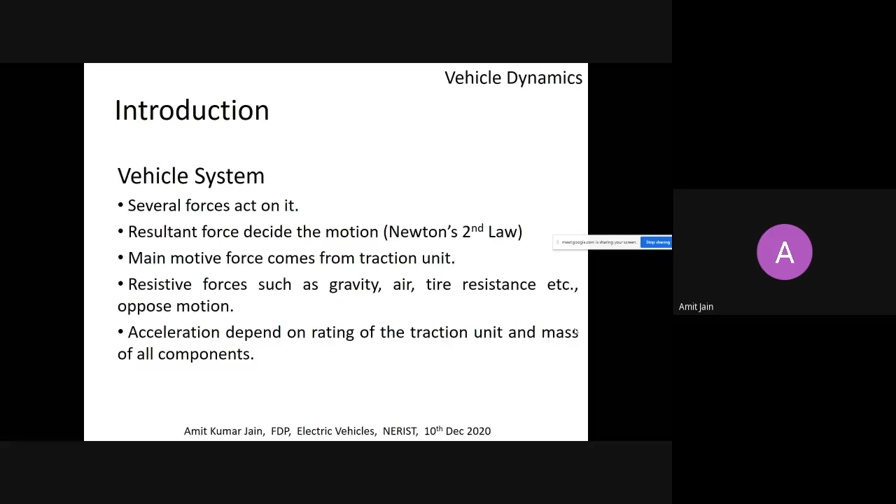Basically, there is something called system level design and something called component level design. System level design is a bigger picture, bird's eye view of the system.

Typically, if somebody asks you what you are looking for, they will say two things. Acceleration should be so good that I can accelerate from 0 to 100 km/h in 5 seconds, 10 seconds. That's how vehicles are generally compared. So acceleration is important.

Secondly, range. Range is not a parameter in petrol-based vehicles, but it is important for an EV, because if you are using a battery electric vehicle, your only source of energy is the battery, and there is a limited amount of energy stored in the system. So range is a criteria.

But these two are conflicting things. Let's say you have a battery with a certain amount of energy stored in it. If you want very high performance, like high acceleration, somewhere you're eating up your energy, and so you have to sacrifice on range. So acceleration means power, and range means energy.

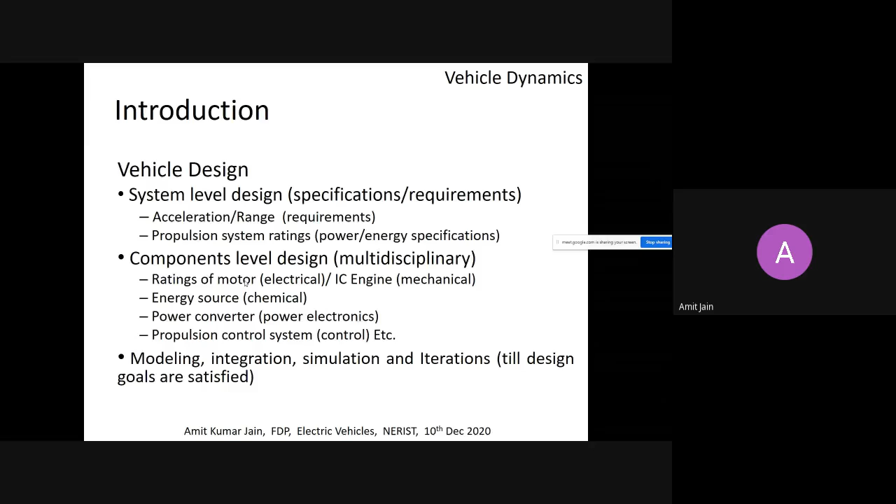And imagine if you have to go for a 50 kilowatt or 100 kilowatt motor, like what is used in a typical high performance car. There you need to increase the DC link voltage to 300 or 500 volts, so that currents are still under some kind of limit, under 200 amps and all that. So these are all things that have to be designed - it's not just one parameter.

As I already told, acceleration is depending on the torque rating. Torque into speed is power, so torque-speed is again power rating. Range is basically a function of energy, which is depending on the battery capacity.

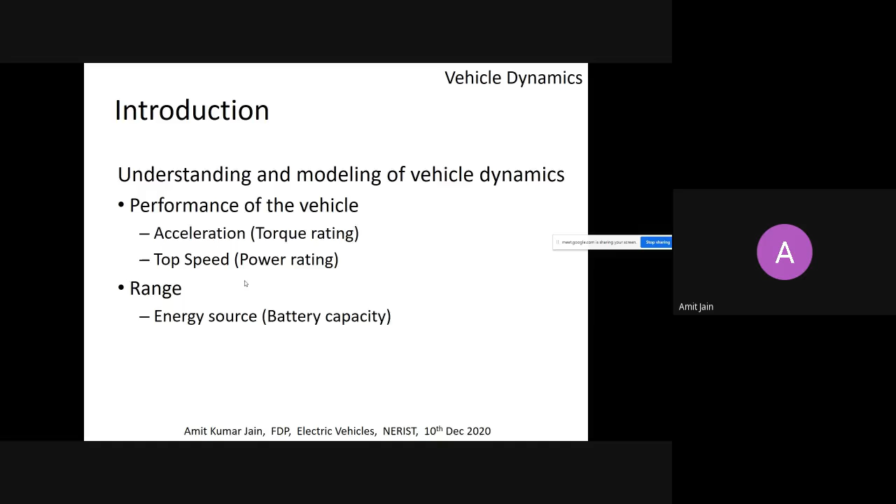So when you go for modeling, there are two types: longitudinal and lateral. We generally do longitudinal modeling because we are not using multi-wheel driven vehicles. It's possible to use only one motor for driving the whole vehicle, but there is another possibility - multiple motors attached to multiple wheels, with each wheel driven by an individual motor. In that case, the lateral vehicle dynamics comes into the picture, and it is quite complex.

But though it's complex, it gives the flexibility that no petrol-based car can give. It takes the electric vehicle to a next level, even better than petrol-based vehicles. Cars like BMW i3 or Tesla are very popular not just because they are electric - the performance and the kind of controllability you have in those vehicles are enormous. You have all the flexibility. All four wheels have four motors, and they are controlled by complex control systems.

You can park your vehicle just by shifting your car by 90 degrees. All of you know that the engine doesn't have a smooth speed control, but an electric motor can have a very precise speed control with very nice dynamics. So an electric motor control based vehicle will be very good - that's another reason why people are looking for this kind of vehicle.

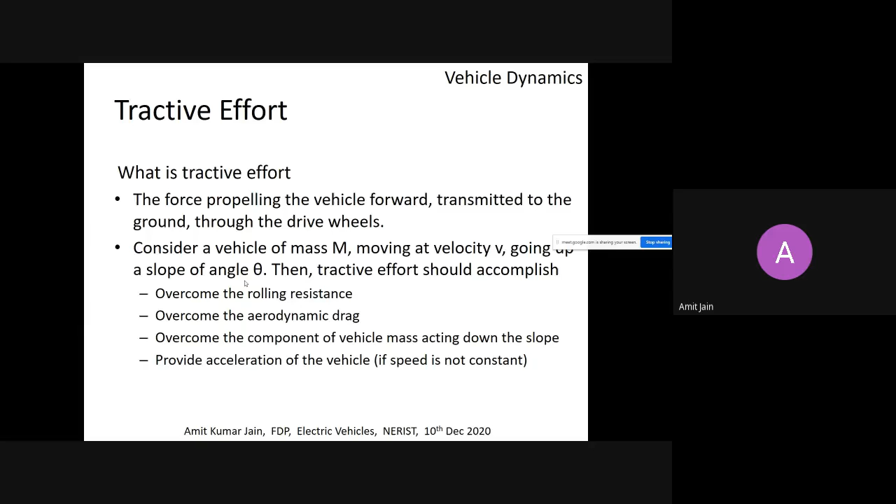So tractive effort - what kind of force do we require to drive a vehicle? These are basic things, but important. If you want to drive a vehicle at certain velocity going uphill at angle theta, you have to overcome rolling resistance, aerodynamic drag, slope or gradient, and most importantly achieve certain acceleration. That is your desire, but other things are opposing it. Sometimes gravity can aid you, and that's important because a negative gradient can be used for charging your battery.

So typically, if you see how these forces are calculated: let's say a car is going uphill at angle theta, you want a tractive effort. You have to calculate the tractive effort required to drive the vehicle, overcoming rolling resistance which is the friction of the tires, the gradient force, and the aerodynamic force, which is the force due to the air.

If you go at higher speeds, and if the design of the vehicle is not aerodynamic in shape, there will be a lot of drag. You might have seen airplanes and high-speed trains have very nice aerodynamic shapes near the engine. It has to be that way, otherwise a lot of drag will be there.

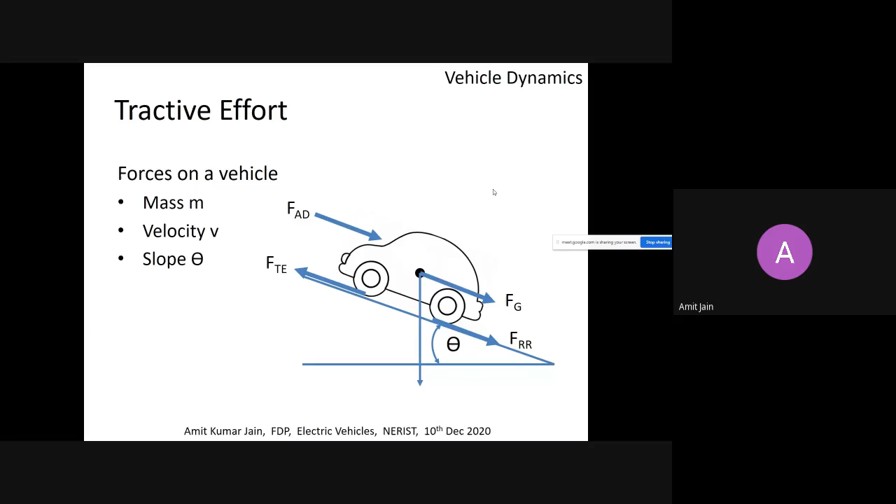So aerodynamic drags are basically two types: shape drag and skin drag. Shape drag - if you have a very bad shape system, it will take up a lot of energy to overcome that. Skin friction is another thing.

Basically, when you move on the road, you are pushing the air at certain speed, but the air adjacent to your vehicle will be at zero speed. So there will be friction between molecules - between two air molecules, one stationary, one moving. This is skin drag.

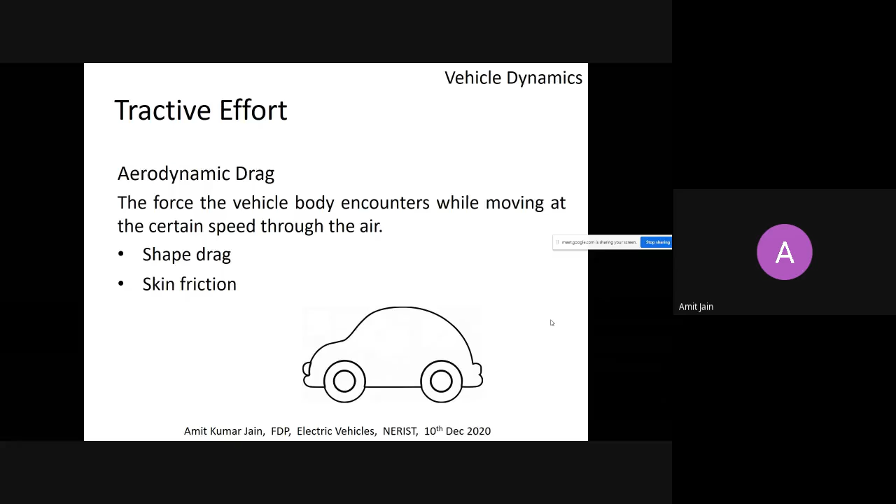This is equally important. If you see a good electric vehicle, it will not have ducts and all that. It will not have outside mirrors protruding like we have in our vehicles on both sides - all those things will be avoided. This drag is a function of the frontal area, the area which is just facing the front, and all kinds of protrusions - side mirrors, ducts, air passages, spoilers - all these will be missing.

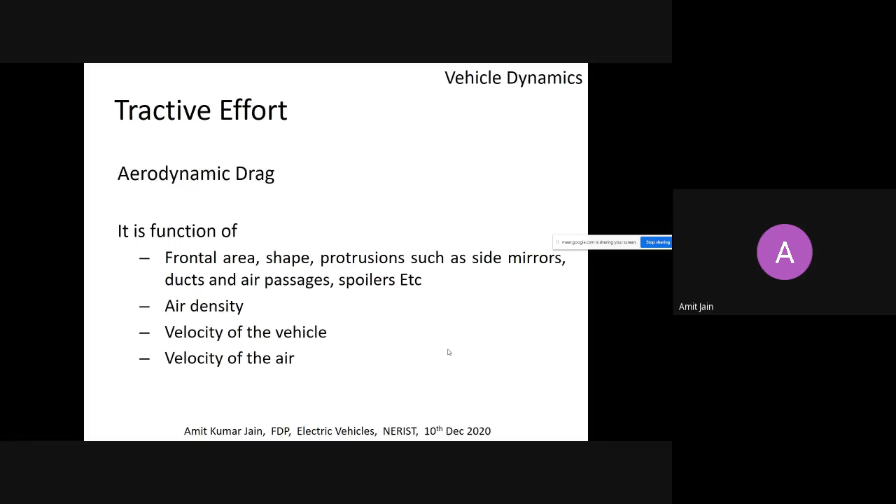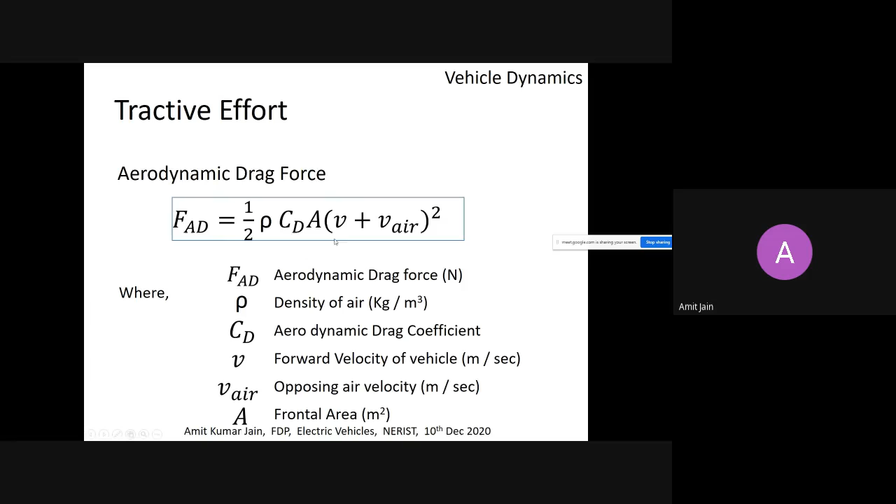If the air is opposing, you have to give more force. But if the air is helping - let's say air is coming from behind - then the force required will be lesser than what is normally required. Typically this drag coefficient ranges from 0.1 to 1.5 or so.

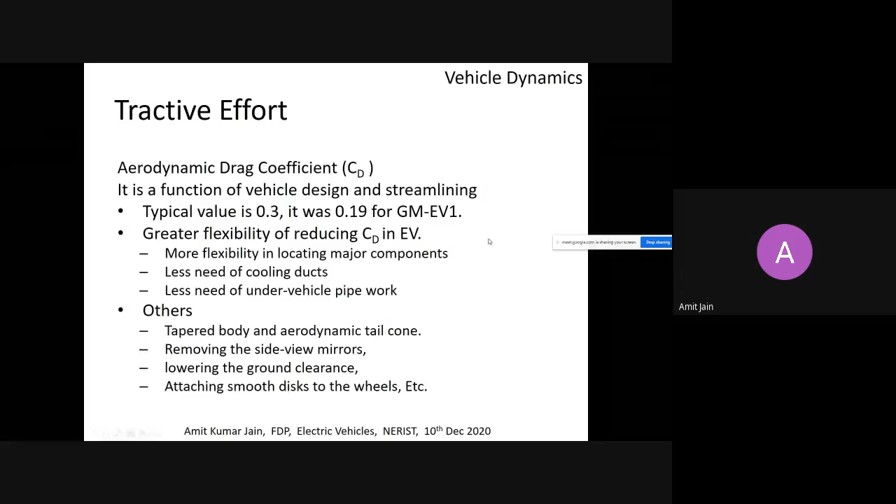At that time, even the design was so good that its drag coefficient was 0.19. This will basically help you understand what is CD. So you can understand if you design something like this.

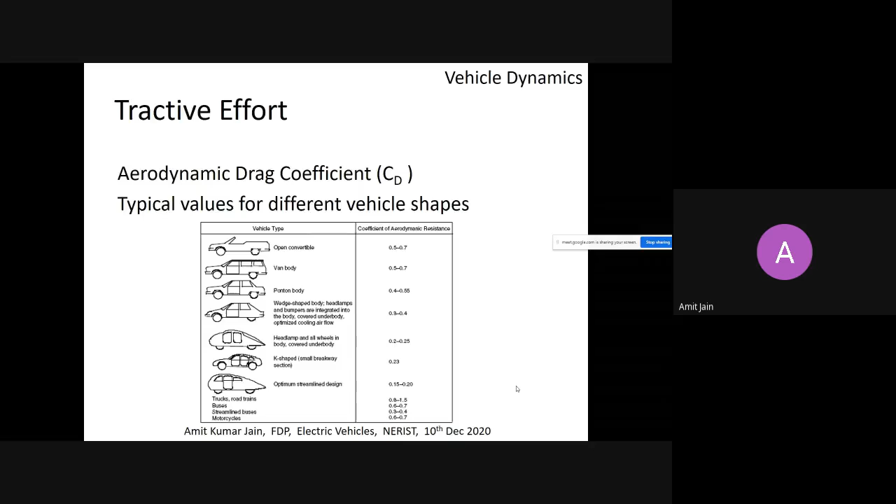Actually, it can be further improved. You can see that these trucks and buses have a very poor CD (drag coefficient) because they run on petrol or diesel. But if this has to be electric, then the design of the buses has to be equally changed. Normal buses, if you use them, the design and weight will eat up all the battery energy.

Air density is different at different climates. Let's say it is very high in cold countries and low in some hot countries.

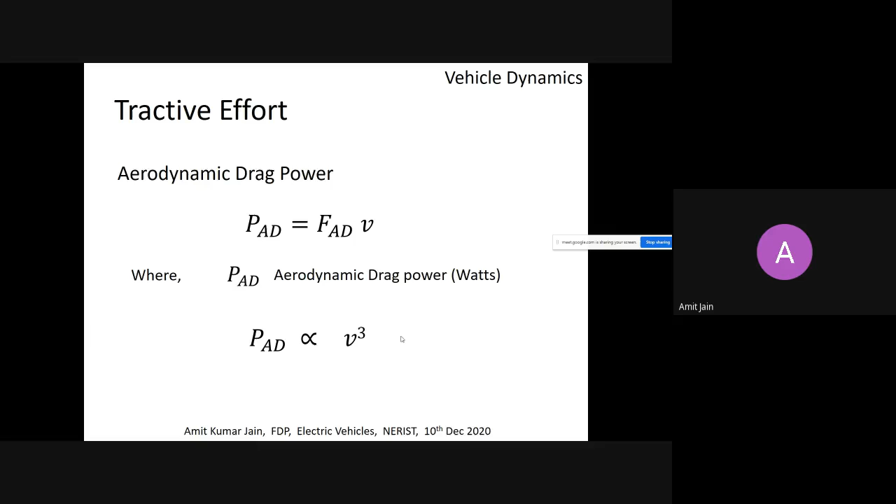Once you know the force, you should know the power. It's a heavy function of speed, a cube function. This force becomes very predominant at very high speeds. Let's say if a Tesla vehicle is running at 200 km/h, the aerodynamic force is enormous. If the CD is not very good, if CD is high, it will eat a lot of energy. So we'll see how it affects things in some simulations.

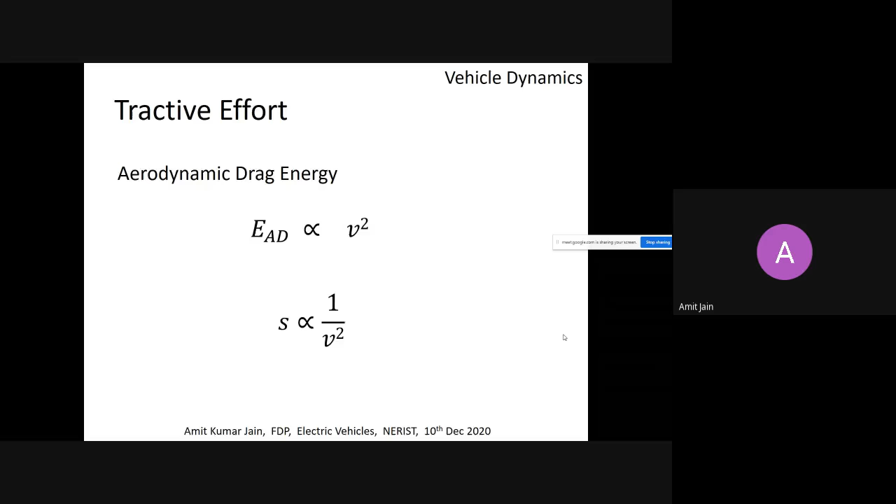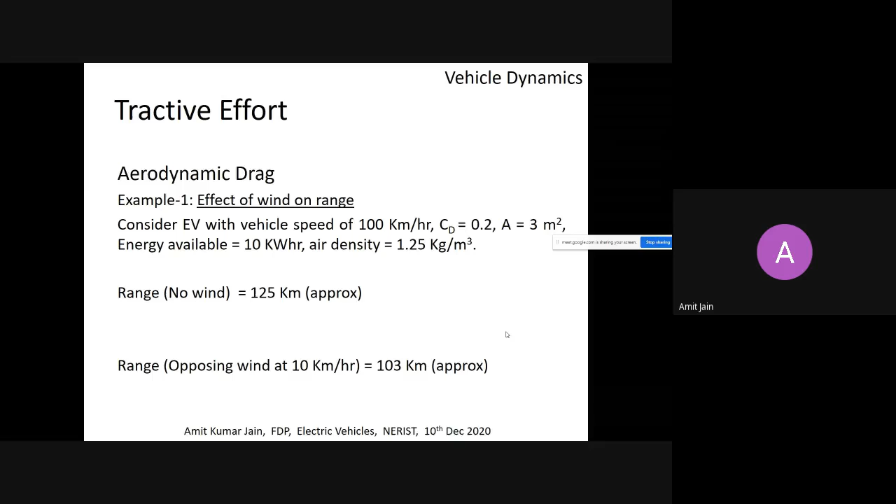Here's an example: let's say you're running at 100 km/h with given mechanical CD and frontal area. Energy available is only 10 kWh. If there's no wind, you can go up to 125 km, and if there's an opposing wind of 10 km/h, you can go only around 100 km. These kinds of winds are normal in some places, and the CD is very important.

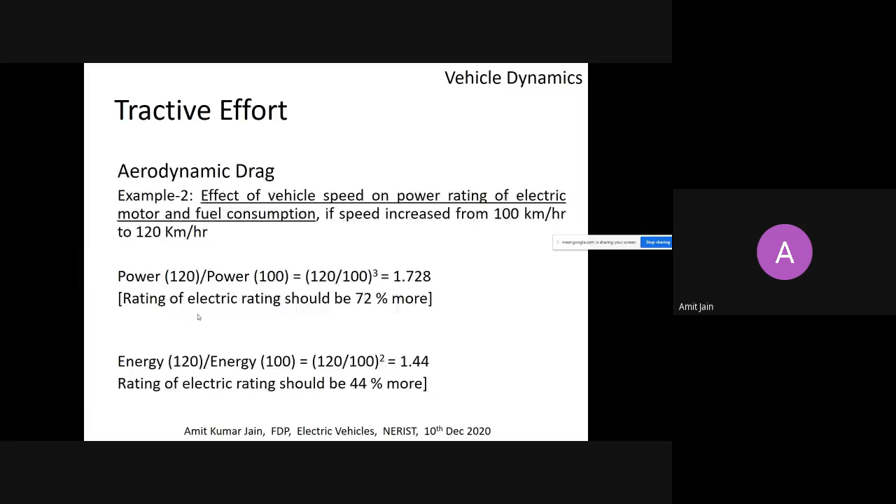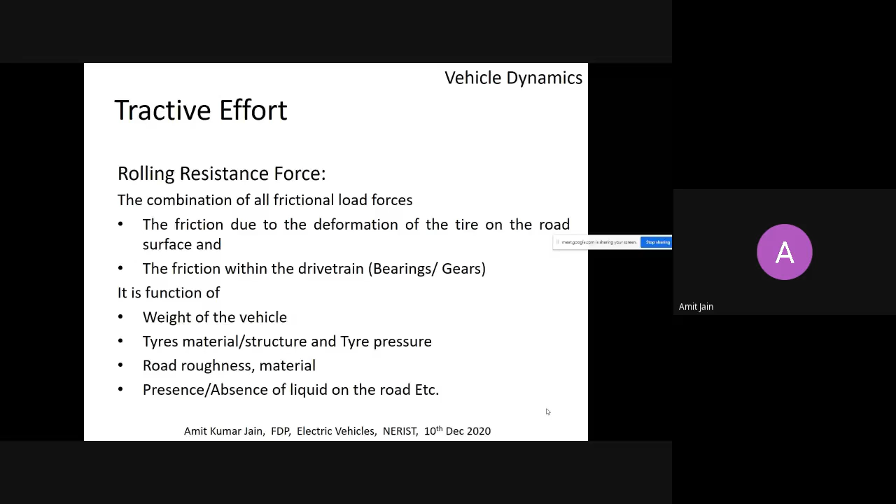Now, rolling resistance force. This is basically due to friction between the tire and the road, and it also involves the weight of the vehicle. When you drive on a very good road, friction will be less, but if you drive on a muddy road, friction will be more. It is lesser on concrete roads; most places use that. In countries where a lot of ice is there, in winters they have a problem of negative rolling friction force - there's no friction because of the ice, and it's a disadvantage there.

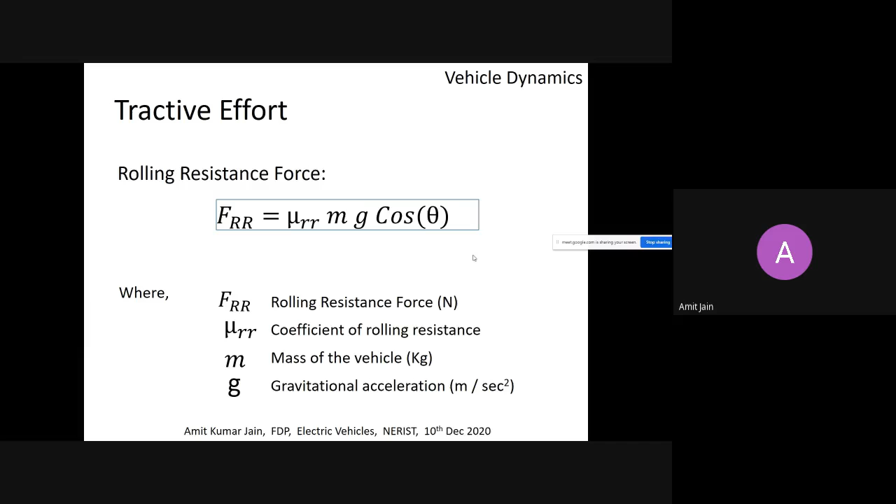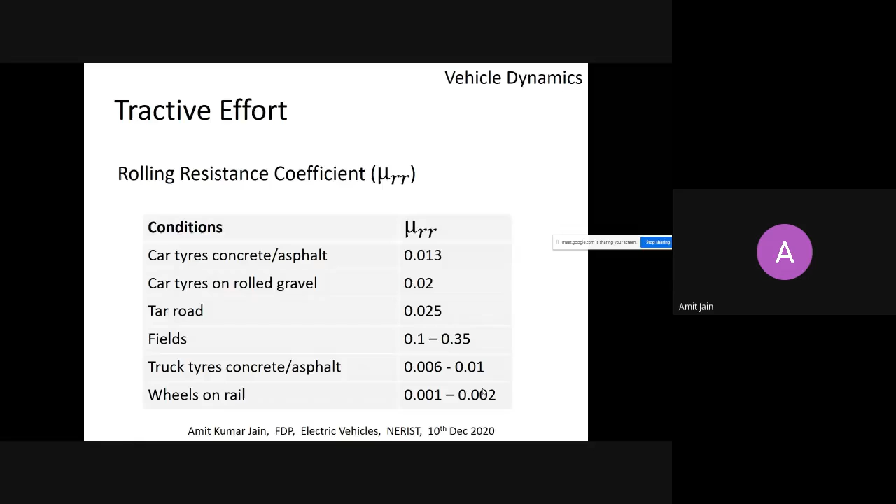The formula is the rolling resistance coefficient into the weight into cos theta, if there is any slope involved; on a plain road, cos theta is 1. On a concrete road you have the least mu. On gravel it's slightly higher, on a tar road slightly higher, and on mud it will be very high. The wheels on rails are very, very low - that's why trains don't face these rolling resistance losses. These are empirical formulas.

This gradient force is basically mg sine theta if you are going up a hill. Theta can be positive or negative. When theta is negative, you have to brake the system, and this braking energy can be recovered as regenerative power if you operate the electric motor as a generator. This is disadvantageous to some extent, but advantageous when coming downhill. But this is a very, very heavy force.

Electric vehicles cannot handle a large theta. Basically, electric vehicles are designed for a flat road, designed for a maximum theta of 6 to 8 degrees. If you use those vehicles for a very high theta, it may give problems, so that has to be checked.

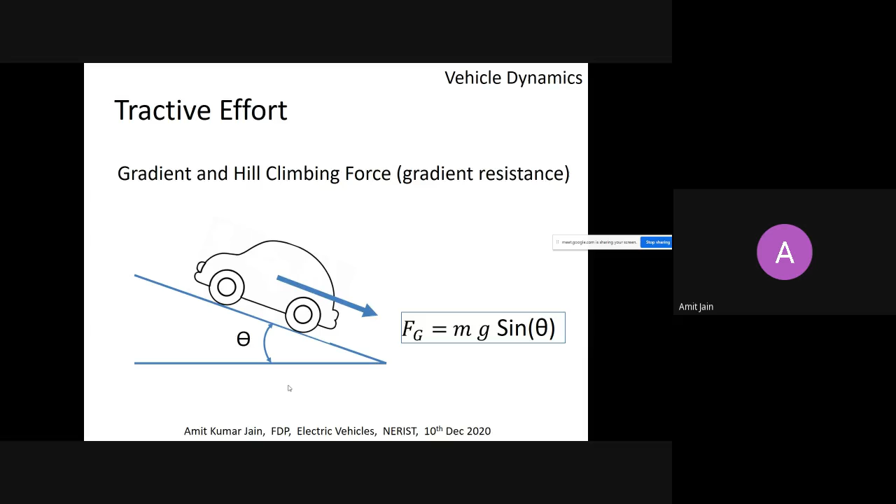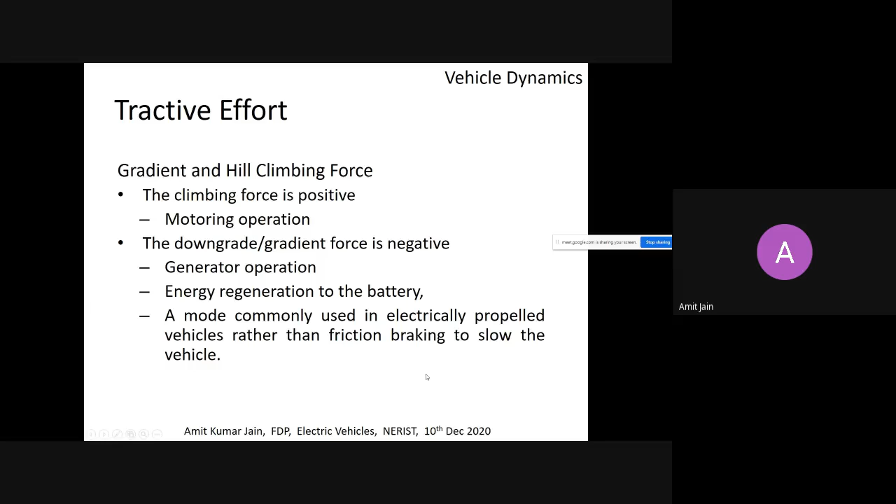So this force can be positive or negative. The negative energy can be recovered using regenerative braking. So there are 3 forces, as you have seen, right? So 3 forces.

But let's say there are regulation agencies like ARAI, Automotive Research Association of India, that's in Pune. That is an organization which gives certificates to all vehicles, whether petrol, diesel, or electric vehicle. So these are the agencies, right? They don't go too much into mu, RR, CD, or all these things. They will just tell you — if you take your vehicle to those regulation agencies, they will do some tests and give, based on this formula, the ABC constants for your vehicle.

So actually now we have to understand, A means some kind of road resistance, B means some kind of inertial losses, and C means aerodynamic drag is proportional to it, but they're not going into the nitty gritty. So at some ambient conditions, these are the ABC parameters of the vehicle, and they can also give the plot of ABC variation with respect to climate conditions or road conditions, but they don't go into specific things.

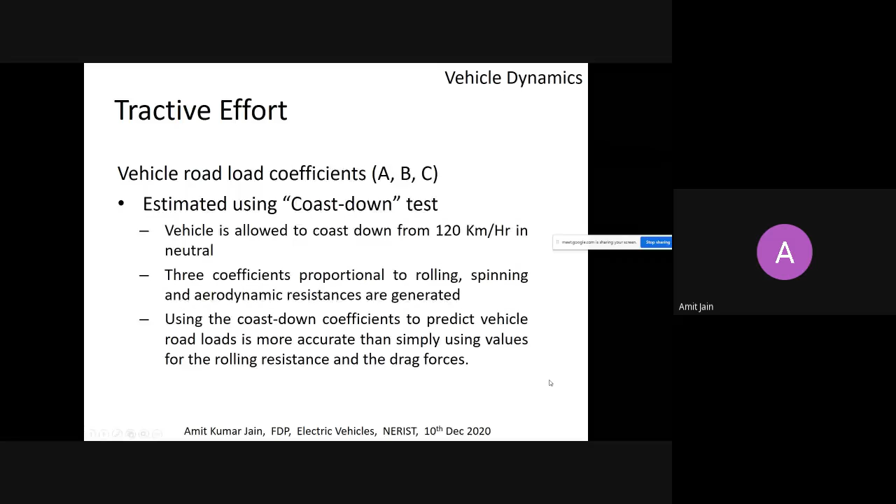So the vehicle is allowed to coast down at 120 km/h in neutral, and then they find out how all these things vary as a function of velocity and velocity square, as a constant with respect to those terms. You can do some kind of curve fitting and all that.

Gradability is a very important term. It tells you what kind of slope you can go up. Let's say when you have designed a vehicle, already the vehicle is designed and everything is there — you have used a motor of particular type, particular torque rating, speed rating — you can tell what maximum slope it can go. So gradability will actually be mentioned in the brochure, if you buy any vehicle.

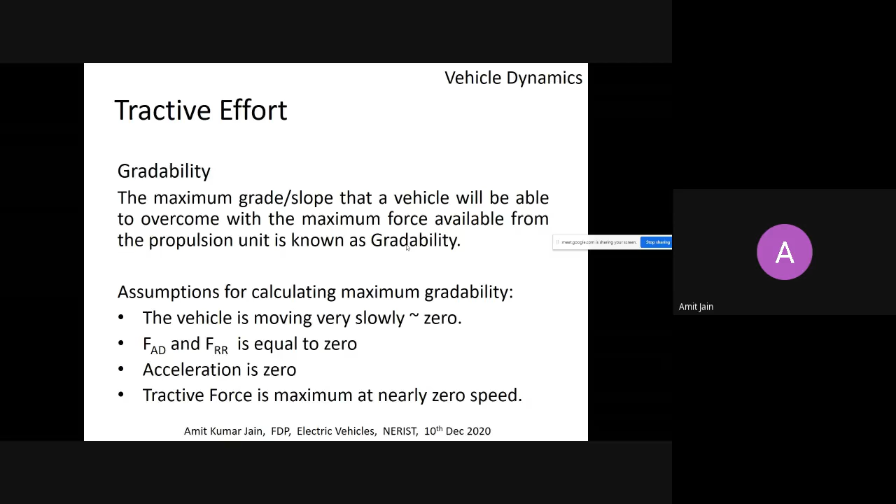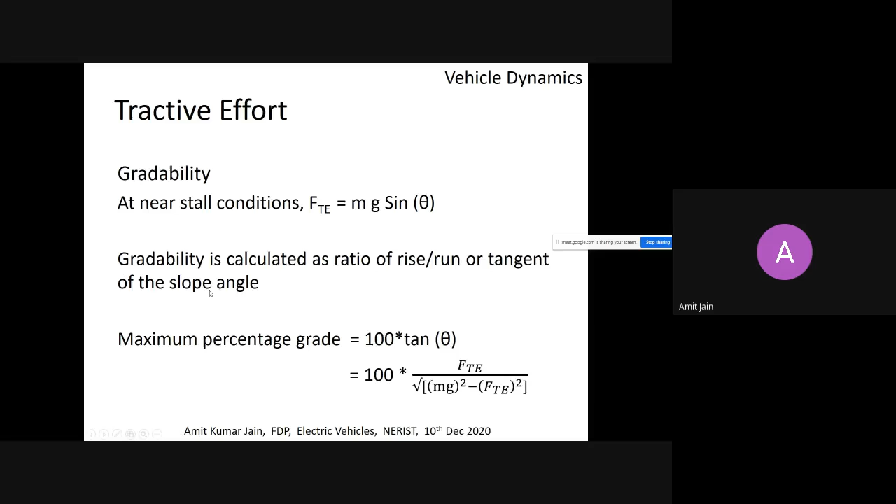Going ahead, how do we find that? Let's say FT is the available torque, the maximum torque force available from the motor. The motor has a particular torque rating, and using the gear ratio, you can find the torque available on the wheels. Dividing that by the radius of the tires, you get the force. This force you substitute again as mg sin theta. So this is known from the motor rating and gear ratio, and we know the weight, g we know, so we can find out this theta. The gradability is calculated as the ratio of rise to run, the tangent of the slope angle.

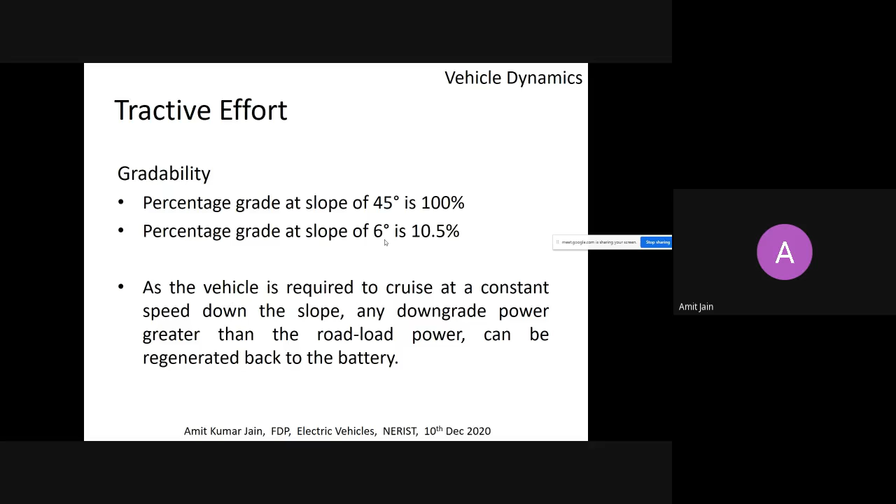So generally, if you see the percentage grade, a slope of 45 degrees is 100%, but 6 degrees is 10.5%. Generally, electric vehicles are designed for a grade of 6 or 8, not more than that, because if you allow more slope to be covered — we'll check this in a simulation — the size or power rating of the motor becomes very high.

So this accelerating force is our requirement—not an opposition force. Let's say we want to accelerate our vehicle at a certain acceleration, dv by dt. This also has to be supported by the motor. So who gives this torque? The torque coming from the motor is serving the acceleration demand and the resistive forces demand.

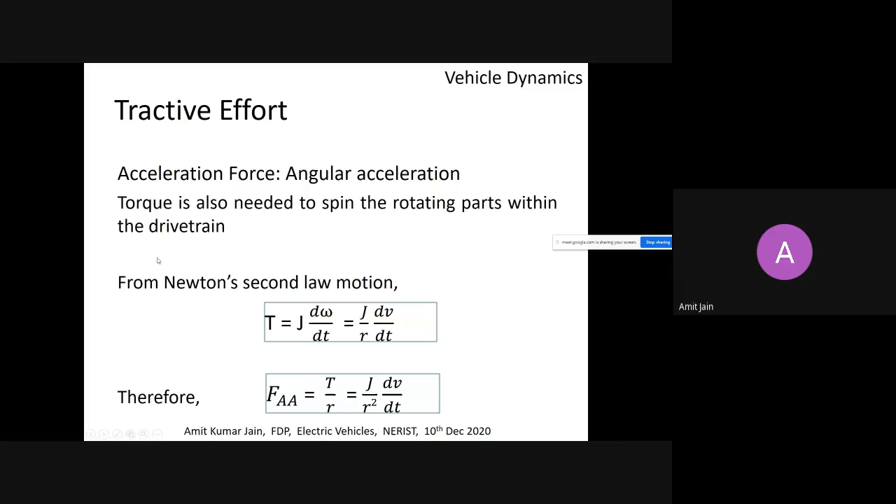There are a lot of rotating components in the vehicle, so there's an equivalent torque because of the rotating parts. Generally these are also added to the linear acceleration term, so there's a torque with respect to angular acceleration also.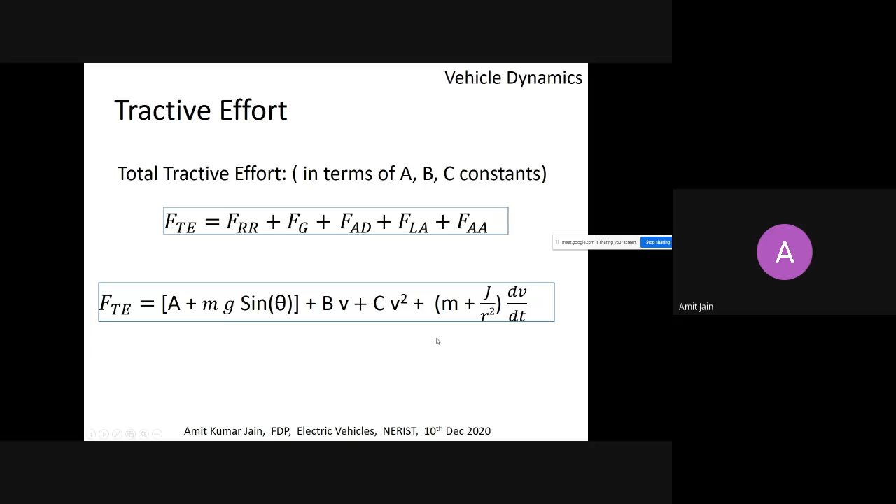Mr. Singh, I hope no noise is coming. Hello? No problem sir, we are focused on you. So something is going on. No problem sir. Actually I can come to the speaker also if you want. Come back to speaker.

So in motoring, this is a system: you have an energy source, which is the battery, a power converter, an electric motor, then a gear, which goes to a differential system, and the differential is connected to two wheels. It can be front-driven wheels or rear-driven wheels.

So this is a system. As I told you, the speed at the axle will generally be of the order of a few hundreds, roughly 100, 200, 300 maximum. But we generally use motors which run at 1500 RPM, 3000 RPM. So you require a gear ratio here, for speed reduction and torque increment. If speed is reduced, the torque will be more in the wheels, because power has to be constant on either side of the gears.

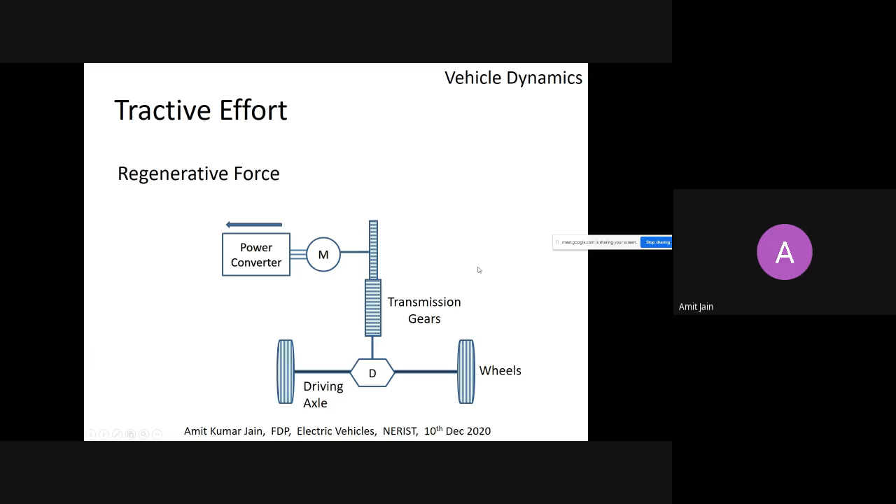So this talk is a mix of modeling and simulation. Let's say we want to simulate this kind of system. If you take any book on electric vehicles, you'll find some typical numbers. Let's say the mass is 1500 kgs, mu r is 0.01, CD is 0.26, frontal area is a good number, theta is 0, and rho is normal.

Let's say your wish is to drive at 40 kilometers per hour. If you drive at 40 kilometers per hour, all these forces—PG, PR—can be plotted as a function of velocity, since they're all functions of velocity. I'm talking about steady state here.

If theta is 0, the gradient is 0. But your aerodynamic drag, you can see this yellow line, is increasing as a function of speed—it becomes very high at high speed. The rolling resistance increases gradually; this is power, and the force is constant: mu r times mg cos theta, multiplied by velocity. So it's just a linear function of velocity.

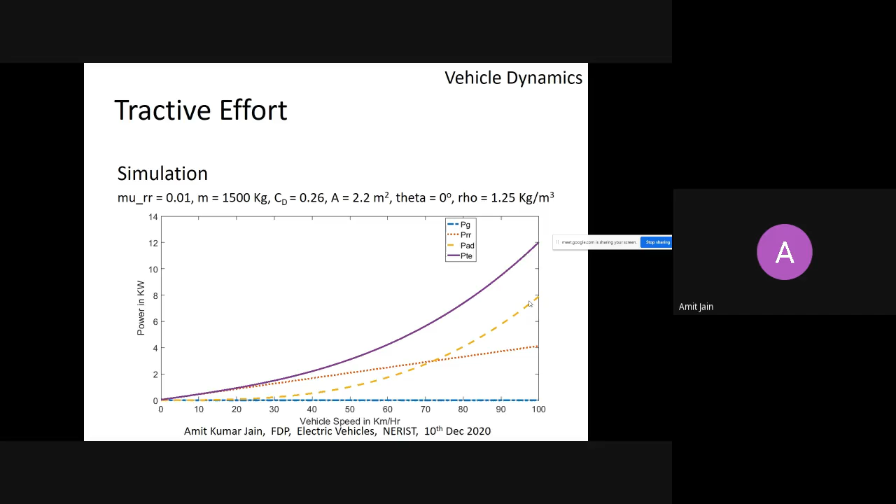This is what we have even seen in one of the examples. If you just discuss aerodynamic drag, if there's no wind, you want 8 kilowatt. If there is a wind of 10 kilometers, you want around 10 kilowatt. So 2 kilowatt more you want, at 100 kilometers.

Let us see how this drag coefficient, the design of the vehicle, is important. If it varies from 0.26 to 0.4, this is a huge change. So this is what I was saying, many people think they can convert an existing vehicle. You take an old diesel or petrol vehicle and convert it to electric. It can be done, there is no problem in that.

But your system was not designed for that - petrol based or IC engine based systems are not designed aerodynamically, and they also don't worry too much about weight and all those things. So basically it's not a good idea. You can design it, you can use your vehicle, but your range and performance will be highly sacrificed.

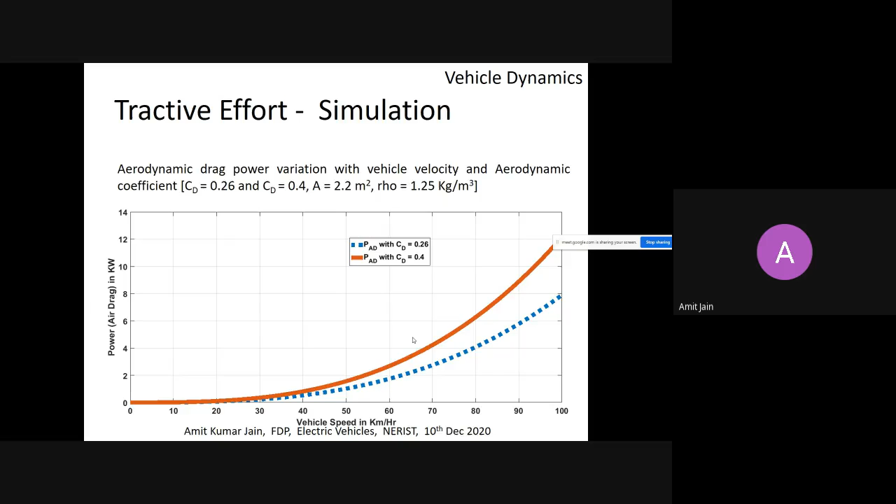Basically, if you want to keep the same power rating, let's say 12, if there's a theta of 3 degrees, you should reduce the vehicle speed to 40. Because if you are using a motor of 12 kilowatt, if you're designed for theta 0, you can maximum go at 40 kilometer per hour. You cannot go more than that.

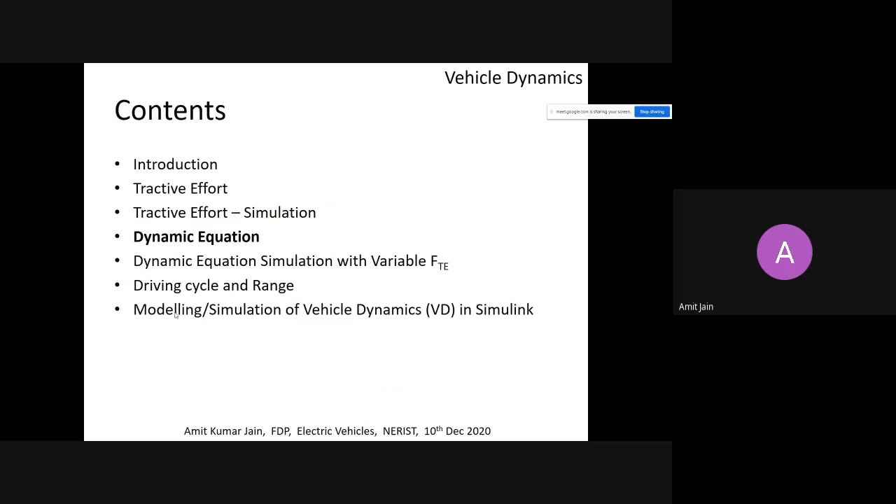Okay, I think maybe I'll just go to some simulations. Basically, today I was seeing - so these simulations what I have shown you now, I've shown you this kind of simulation. These are plotted in MATLAB only.

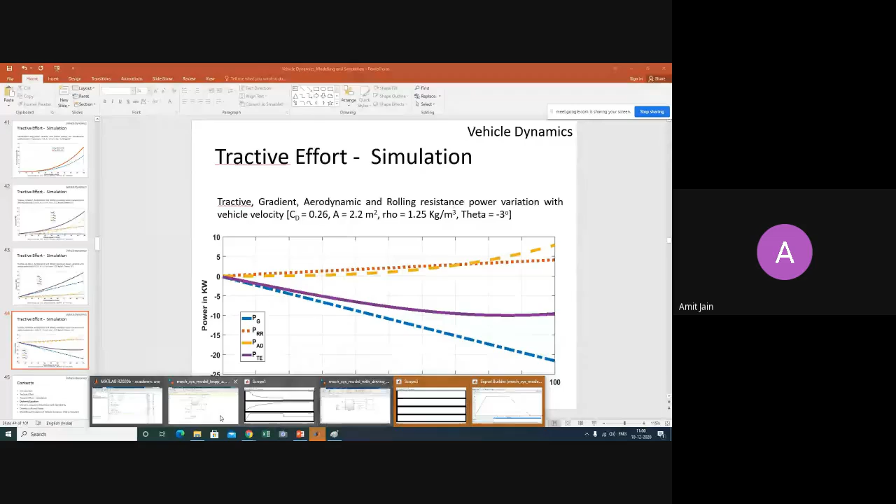So you can just write an M file program. Just give a gear ratio, radius of the wheels, mu RR, CD, these all parameters you add, efficiency of the gear, rho, Tmax. Tmax basically, let's say here we are telling that we have a motor which has a maximum torque of 40 Newton meter.

And let's say we have no wind or no theta. If we are using this kind of vehicle and we operate all the torque right from starting, what will happen? Let's say you have pressed your accelerator of your electric vehicle to full, continuously pressing from starting. Your vehicle is at rest, 0 speed, and you accelerated. Let's say you are on an expressway where you can afford to do that. You pressed your accelerator to full, then what will happen? So it will tell you the performance of the system.

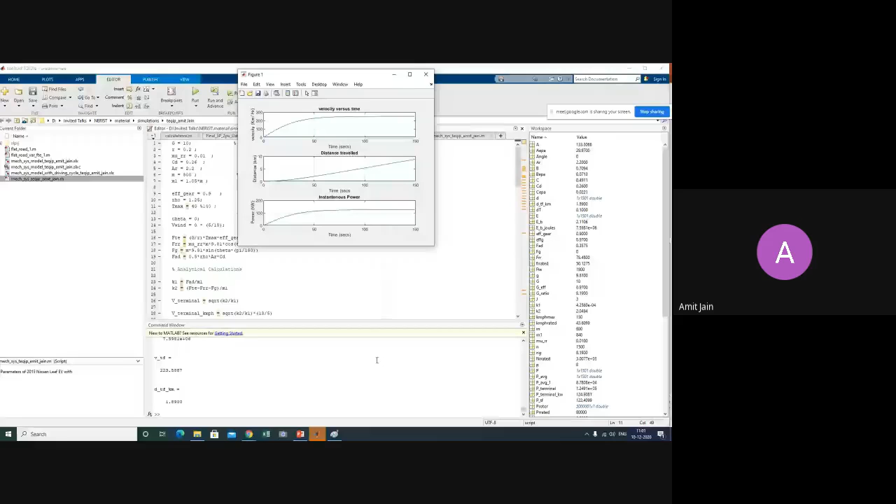This is an important thing. So basically here, what will happen? The speed will increase, and let me run and I will show you some graphs. Probably it is there in my simulation also.

Okay, I can show it now also. So if you do that, this is the performance. If you have a system with these mechanical parameters, and a motor with torque rating of 40 Newton meter, if you just press the accelerator, what will happen? The speed will increase, keep increasing, and settle down. So this is the maximum, the settling, where the force balances.

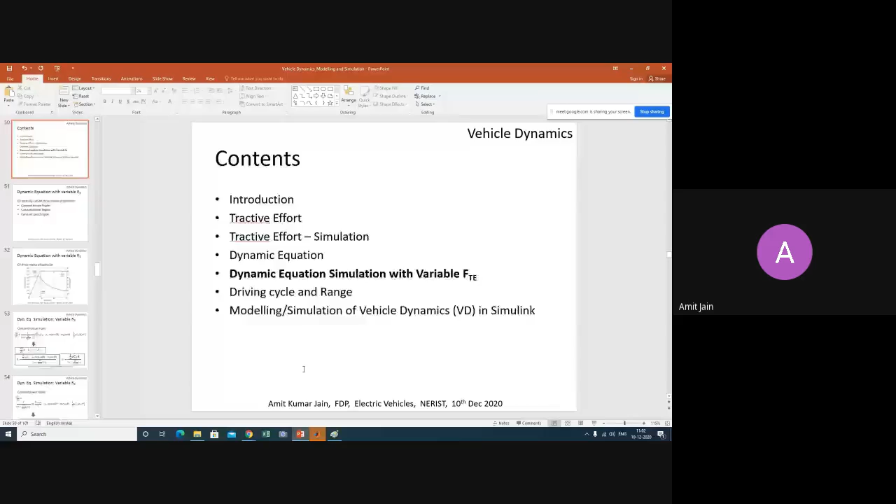And the distance is also coming up. So the power is basically a function of force into velocity - the force is constant and the velocity is increasing. So this is the power. Basically, you require the motor power rating to be somewhere around 130 kilowatt. So the power rating of the motor will be 130 kilowatt, and the torque rating should be 40 Newton meter. Only then can this mechanical system reach this speed.

So here you can play, right? You can say, okay, I don't want to go to 250, I want to go to 100, or 150. If you want to go to 150, definitely the power required is... I don't know how to see that right now, but you may require a motor of only 78 kilowatt. So this kind of analysis can be done - this is what is called iteration.

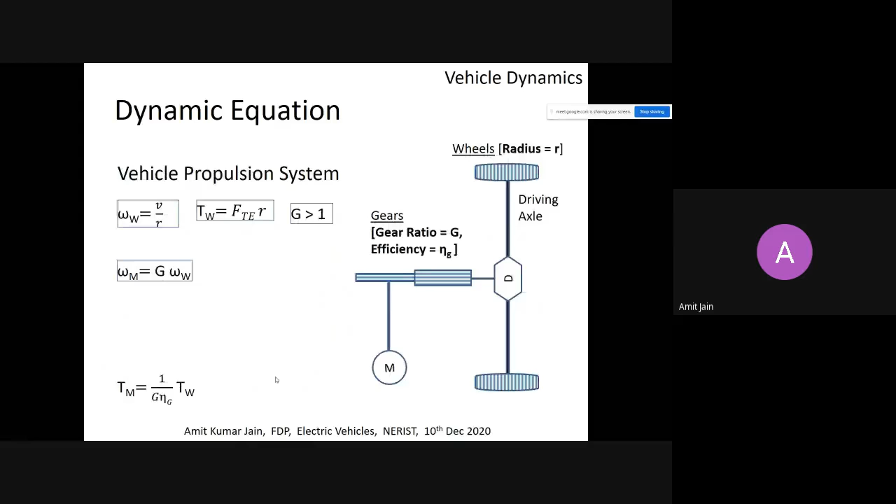So this is the force equation we already know, and we can convert it to this motor equation. This velocity is still the wheel velocity, but we are converting back this Ft to torque of the wheels and the torque on the motor. So for this velocity performance and this dv/dt performance, what is the motor torque? We can calculate it either way: we can give this as input and find out the performance, or we can give this parameter as constant and find out the other. That's what we have done some time back.

So basically this can be written as this kind of equation. Just a minute, I am coming.

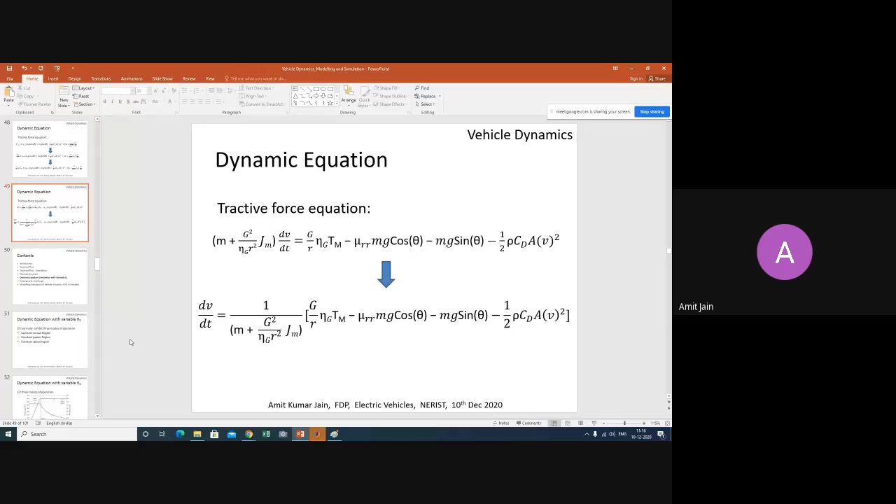So let's say we want to go from one city to another city, and the expressway is there, with no problem of traffic and all that. So what we'll do? We will go with maximum acceleration starting. Let's say if a motor has some power rating and some torque rating, we will apply maximum acceleration and allow the motor speed to go. So we have seen that, right?

So we have seen this thing, right? Where is it? It is here. So we have seen that if you just put the acceleration, the speed will go, and it will go to some maximum speed. It will go, and you cannot go more than that. Right? But what should be the design?

That's the fastest acceleration we want to go, or we will say okay, I want to go only 100 fast, and after that I can go slower. Let's say somebody says I want to go at this acceleration only up to 100 km/h, but after that I am ready to sacrifice my acceleration. Maximum speed will still be 250 only, but I don't want to go at this acceleration - I am ready to go at a slower acceleration.

Then what will happen? You don't require much torque. So you can say that you want full torque here, but you're ready to sacrifice your torque here. That is what we know as the constant power region. So we should not design the machine like this.

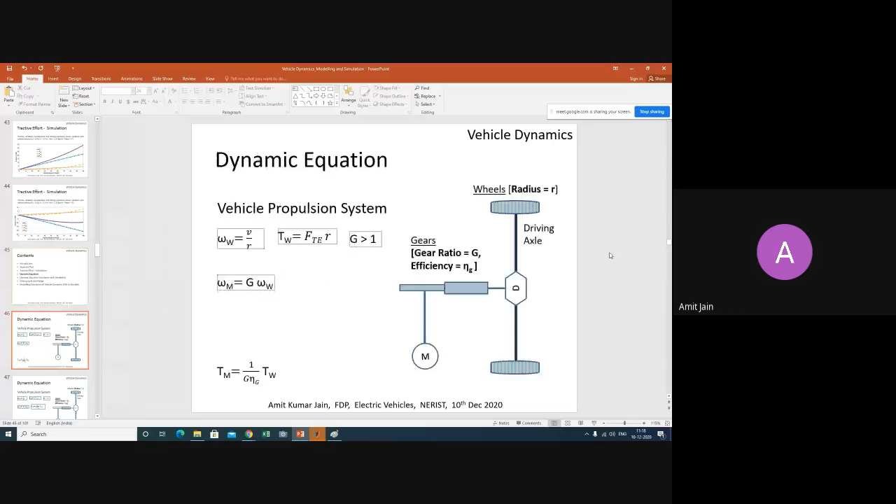Okay, so rather than always operating in constant torque, we design the machine such that the size of the motor is less, the weight is less, and the cost is less.

We design the torque and power of the motor such that our initial performance is good, but after that I don't want to increase my power anymore. So I am telling that I will use a motor which is, let's say, 70 kilowatt for this application.

So if you use 70 kilowatt, what will happen? At this speed your power will be reached, you don't have any more power available, you only have 70 kilowatt. So because you have only 70 kilowatt, this speed will become slower. That is okay for you.

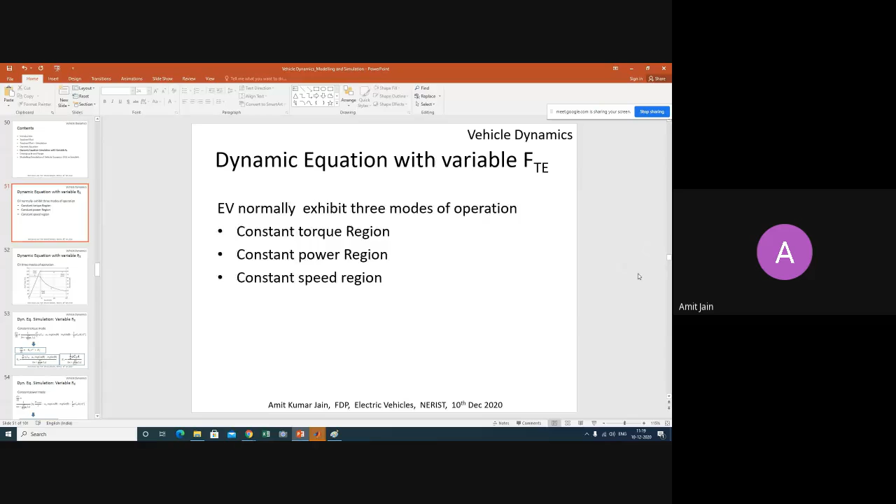So what we do: we apply the rated torque of the machine initially, speed will increase, and when it reaches this rated speed, rated torque becomes rated power. This is the machine design - rated torque, rated power, rated speed, we fix it. So this is the rated power.

Up to this time, the acceleration will be very good because you are applying maximum torque. But after this, your machine power is saturated - you don't have any more power to accelerate. So the acceleration you achieved here is not possible anymore.

So what you will do: your power is constant because this is the power rating of the machine, and torque into speed is power. So torque is constant, speed is increasing linearly, so power is also increasing linearly. Here you reach the rated power.

But still you want to increase the speed - okay, that's fine, but you cannot violate the power. So what you will do: the rated power divided by whatever speed you want to increase to, you will decrease your torque such that the new speed and the torque equal the rated power.

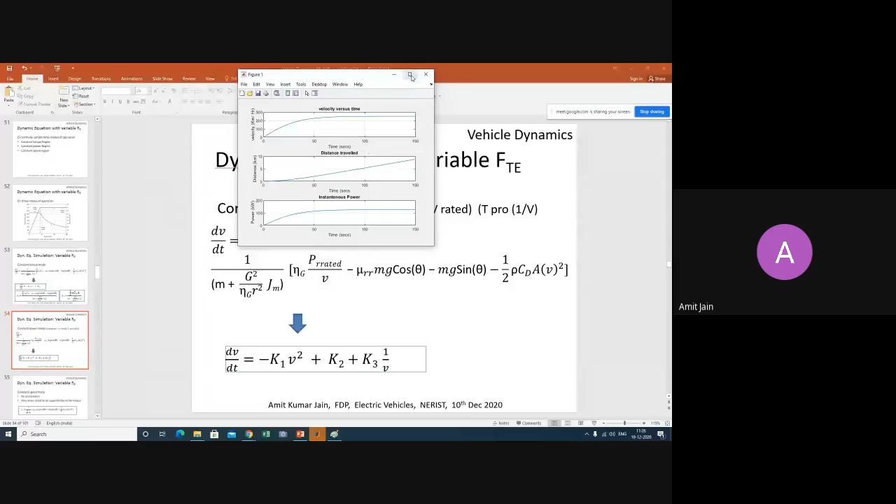So let's say here the motor is 40 Newton meter, and this is the thing, right? So this is the performance. Okay, now so we told that we will use... so we actually, here I'm telling that the motor power rating is 150. If I'm telling that we will use only 70 kilowatt power rating.

Oh, this is in kilometer. Okay, I think I should do... okay, I cannot tell here. Maybe I can tell using... I think proportionally I can do that.

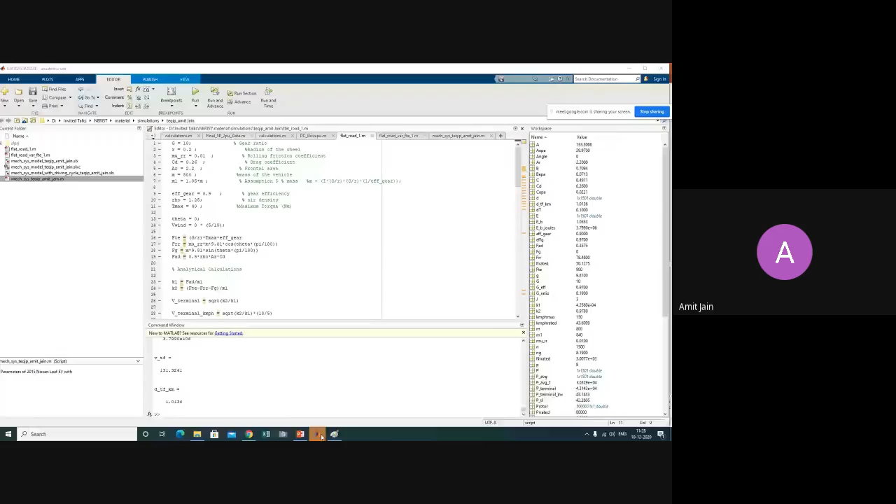Yeah, if you use a less power rating motor, you cannot even reach this 250. Yeah, so no, you can reach, but actually we are affecting the torque. We should, without decreasing this, we should decrease the power rating. So we should limit this, I think all of you can understand what I'm talking. So we should use a motor. Automatically, if you use a motor, your performance, you can still reach 250, but not at that... I think we'll see in the next simulation. No problem, so I think this simulation we are not...

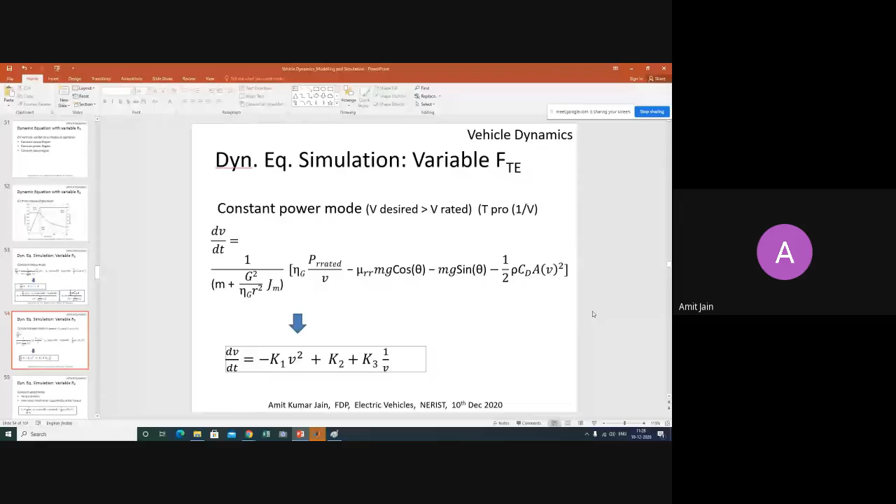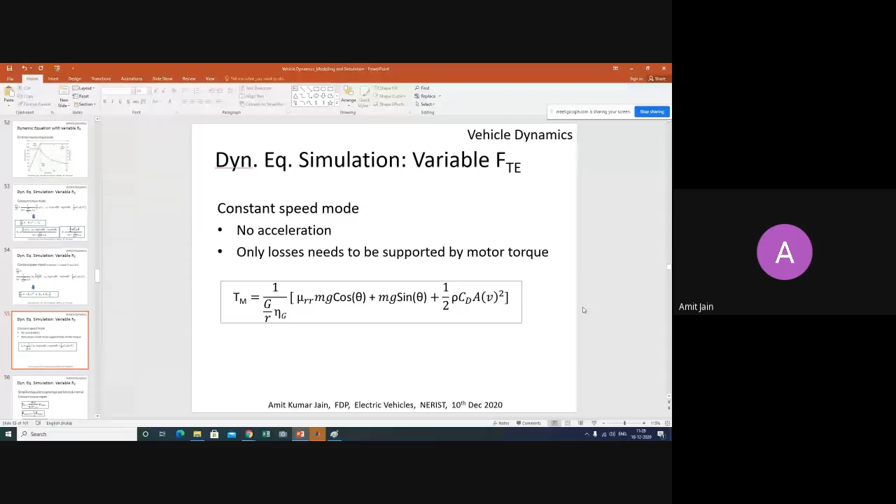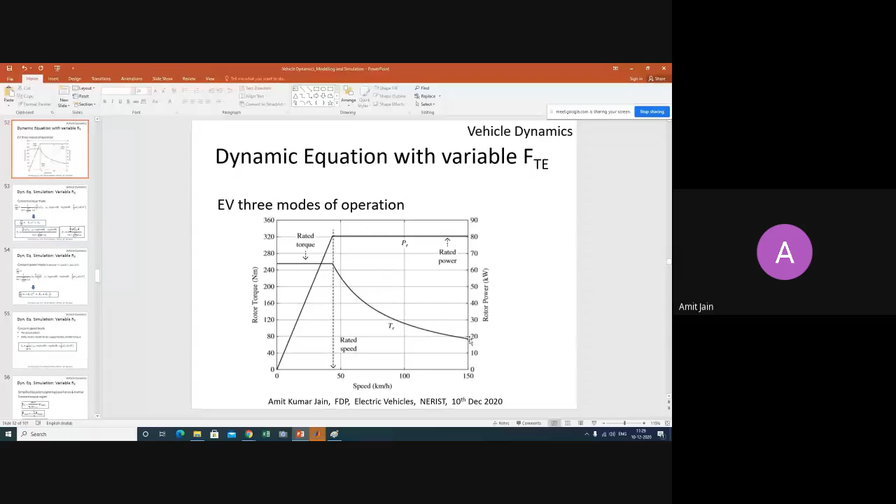So basically these equations will become different in constant torque, constant power, and constant speed mode. See, there is no acceleration, right? In constant speed mode we are not accelerating anymore, so this dv by dt term is not there. So what torque you want is still, it will be constant, only it will support losses. So only losses has to be supported in the constant mode. So basically if you see this curve, this torque, acceleration is still happening, but after that, since the dv by dt term is gone, this torque will come down, it will come down very low. So this we'll see.

Okay, so Dr. Singh, I think it's only 11:30, so shall we take a break or something? Sir, it depends on you, sir. No issue, we can take a break also, and we can continue also, sir. Sir, what do you say, sir? Okay, nice, I'm okay, one minute, so I can continue for still 15 minutes, then we'll take a break. Yeah, no problem sir, okay.

So basically it's also possible to do some kind of simplification. Actually I have not explained this, but anyway, this is what we have shown earlier also.

Yeah, so this is what I wanted to show. See, here you can see that the acceleration is faster, then the acceleration has become slower, and then here, acceleration, there's no acceleration. So this is kind of constant torque region, constant power region, and so up to here, this is constant torque, constant power, right?

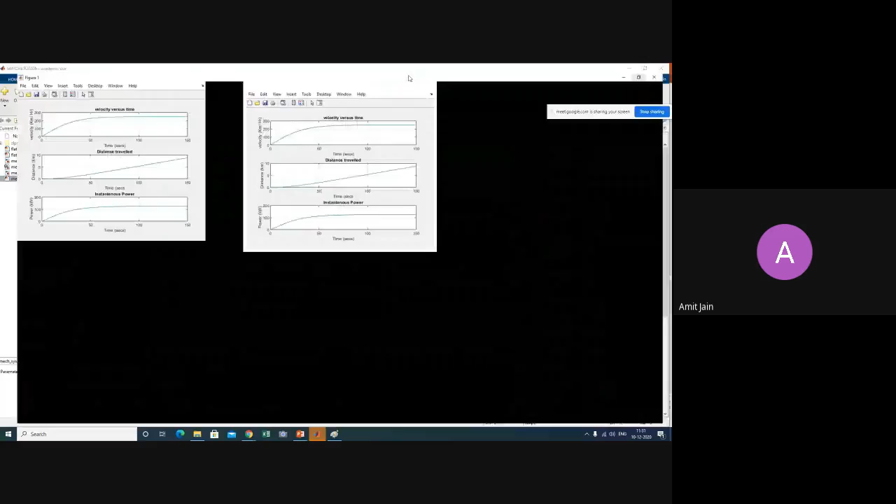Okay, so now I can probably explain this, I think this is the same thing. So here for 250, we required a power of 120, right? But I think for this application, what I am telling, if you do that, the power rating will be enormously low. So something like so.

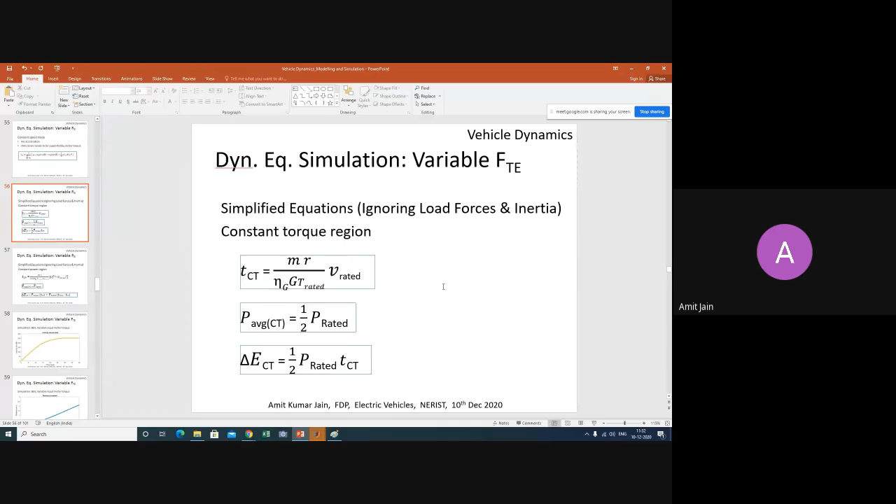So here we have the constant power region, and then this is the constant speed region because we don't want more than 250, so this is reduced. This is an approximation equation. It's possible to approximate these things and calculate this time if you give rated parameters such as P rated, V rated, T rated. It will be in constant torque. All these things can be calculated analytically, so I'm not going into that. The approximate calculations are quite good.

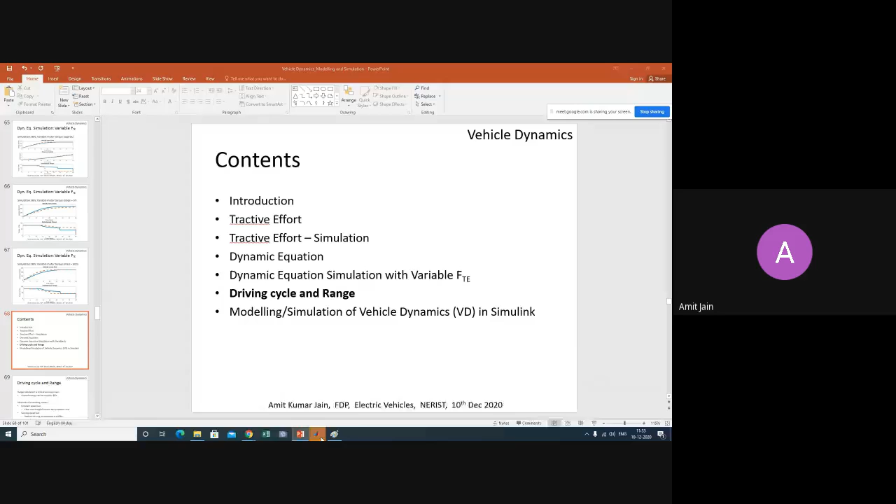Similarly, this distance is also calculated. Distance is velocity into time. So if you do that, you can basically calculate the distance increasing, shown here in kilometers. So this also is important.

Now somebody can ask me, what is the range of this vehicle? How to calculate range? This is a performance we are giving, we are giving full torque, using a motor of this power rating, giving maximum torque, and it's accelerating and going at higher speeds. But what is the range?

Where will we stop? There is another thing which we do, we also plot energy. Energy is the integration of power into time. So if you plot energy, it will also increase, and you can see the available energy. You have initial energy available in the battery, and when that energy is depleted, my vehicle will stop. Where all the energy is depleted, the system will stop, and that is your distance covered. That's how you find the range of the system. This range calculation is equally important.

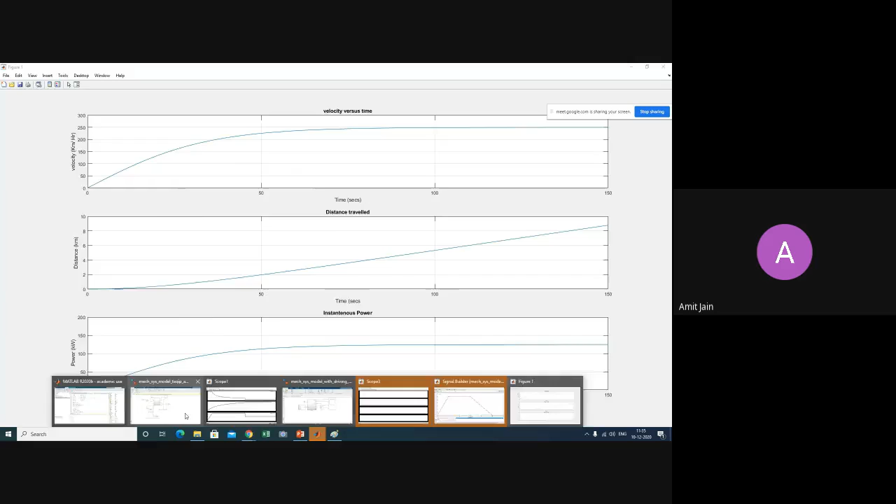So this kind of very simple MATLAB programs you can write. Here we have written all the mechanical parameters, then calculated. Once we know the Tmax, we'll calculate the maximum torque, the tractive effort you can actually give to the wheels, and these are the resistive forces which are these constants. You can write these equations and plot them. These are the equations I was talking about.

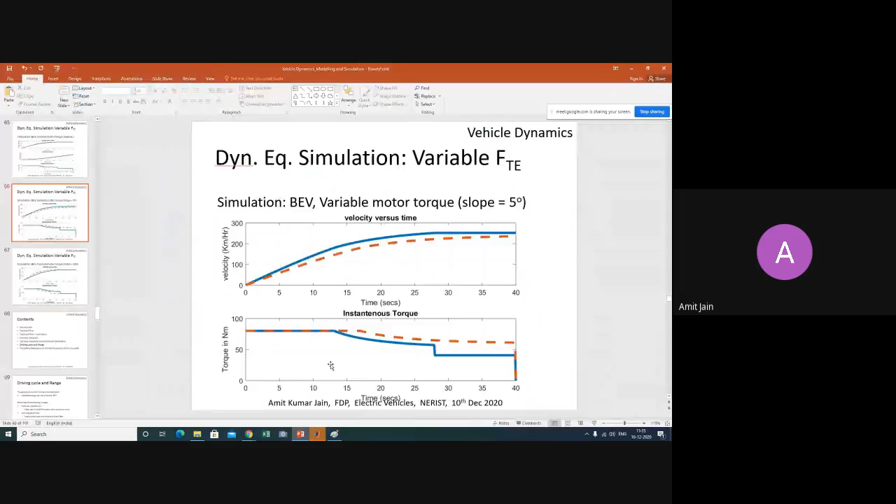This is the equation as I was talking about, right? So this performance is only for the constant torque region. This equation was plotted with K1, K2 constants put in, and you can write this as Vn plus 1 minus Vn by T. The Vn is the previous velocity, you can write this in Euler form and do the integration, since velocity is the integration of this. So this discrete equation we have written.

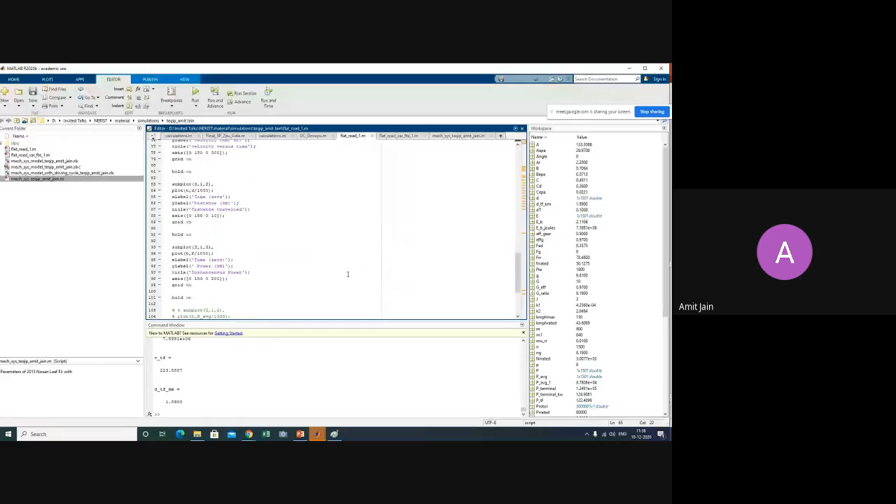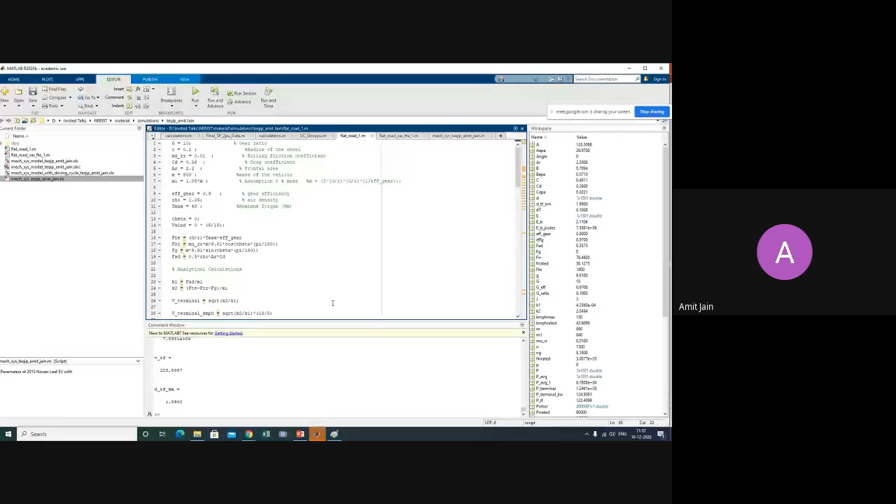So I think Dr. Singh, can we stop?